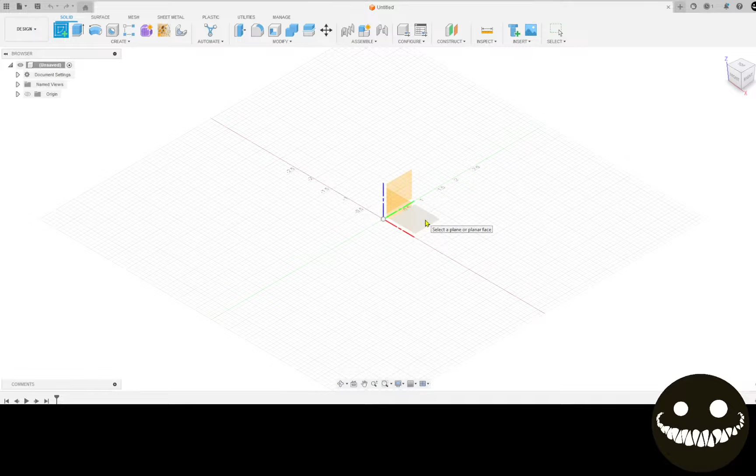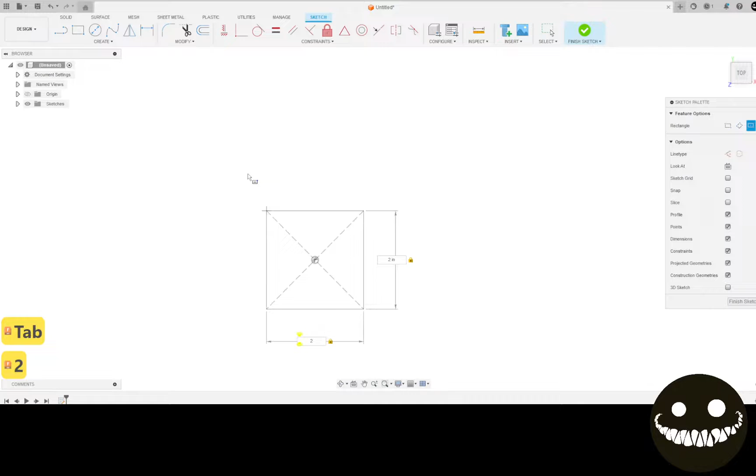I'm going to pick a rectangle, selecting a center point rectangle. I'm going to create a 2 and use tab to move to the other dimension, making a 2-inch square. Now I'm going to hit C to bring up the circle tool, or I could also access it here. Start at the center, pull it out 1 inch.

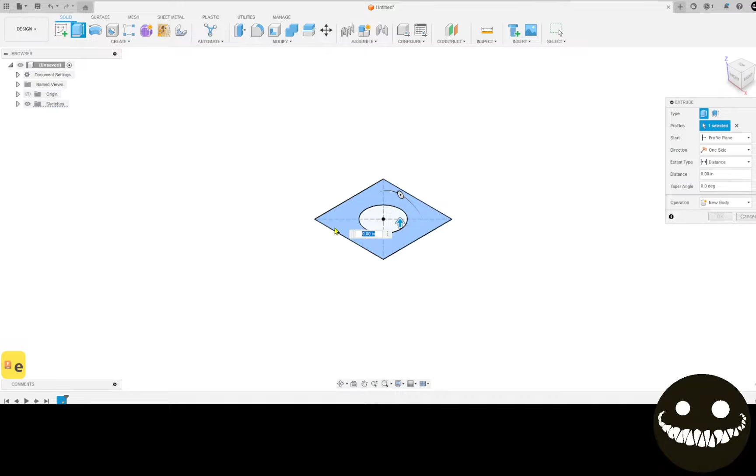Now from here I'm going to hit E for extrude, turning this two-dimensional sketch by adding a thickness of the material I plan on cutting, in this case 14 gauge, into a 3-dimensional body. You can see here it's saying it's making a new body. Now this sketch has become a body.

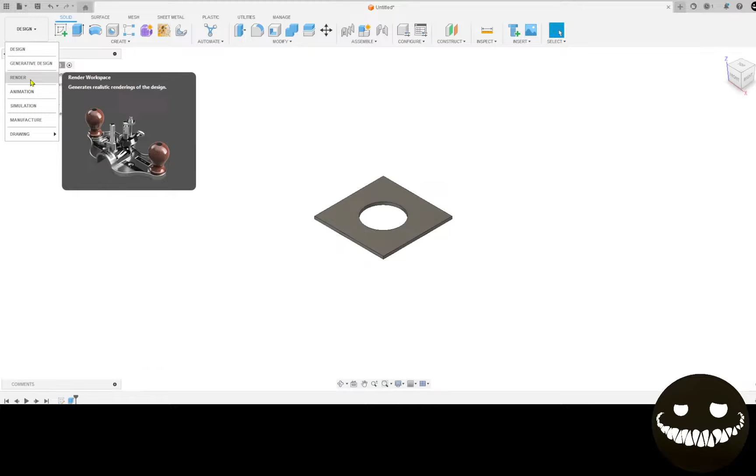From here, we'll move from the design workspace to the manufacturing workspace. And now in the manufacturing workspace, we'll make sure we're in the fabrication tab. We're going to go over to setup. Clicking setup will bring up the setup menu.

A few things to note here: we have the body that we created, and we have this golden shadow around the body, which is a representation of the material space we plan on using. And then the X, Y, Z, which is our origin on the work - where 0 is on the workpiece, the starting point.

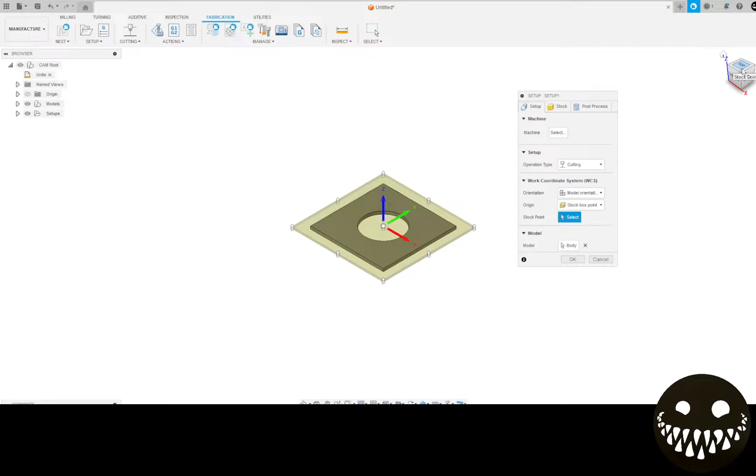So the first thing we want to do is move that stock point, or this 0 point, to the bottom left corner. I'm going to move the navigation so we're looking at the top, and this is how it would look sitting in front of the Pro. We always go to the bottom left-hand corner.

You can see we have a little bit of extra material on the edge, and that's because in mine I happen to put a default of adding an extra 1/4 inch around. In actuality, you'll end up with a bigger piece of material. This is just going to be your reference 0.

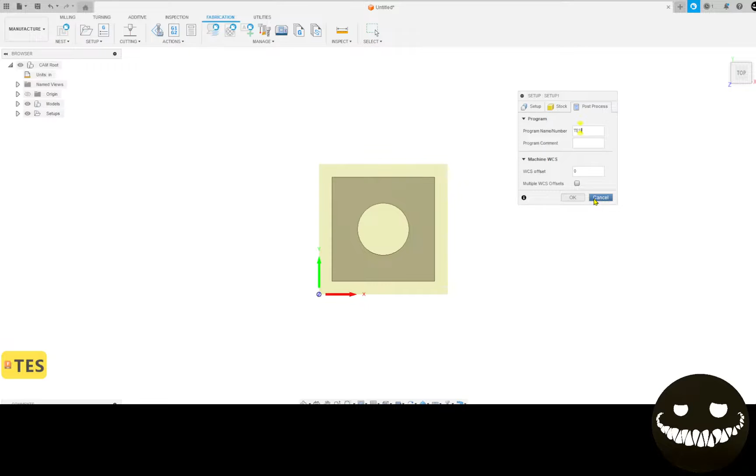In the post-processing tab, I like to add in a name, so we can do test square. And right below here, if there's any particular comment that you want in the G-code that you can watch later on or look at later on the machine, this is where you would put it. I'm going to hit OK.

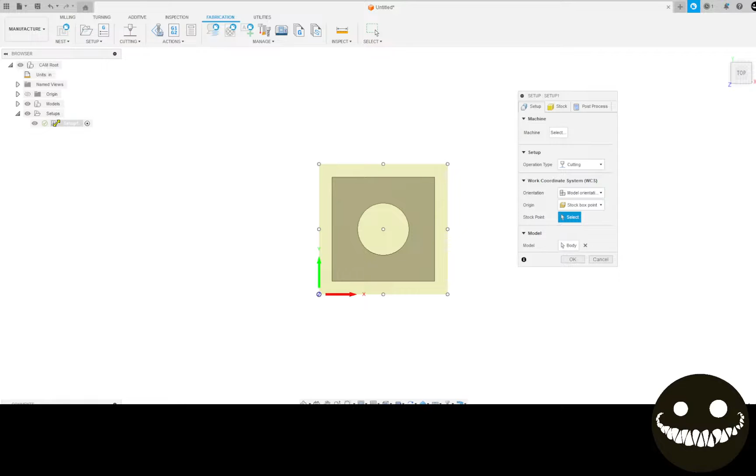Actually, I can edit this just by double-clicking this folder. And then I'm going to go back here and I will add a comment, just so you'll see that in the G-code at the end when we go look at that.

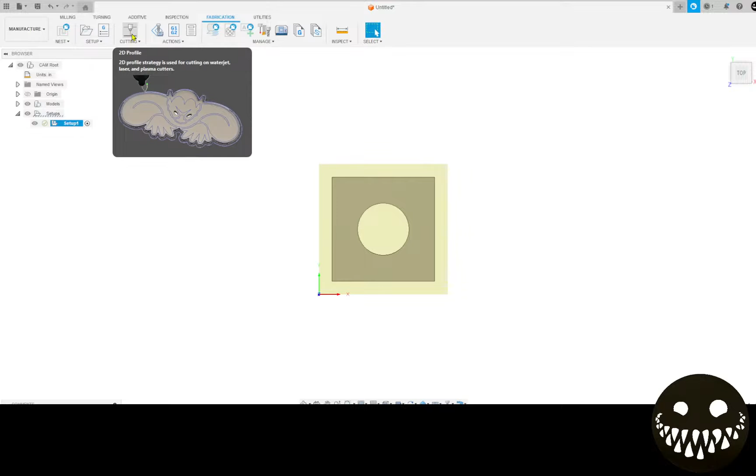Now we have that set up. You can see it's been created over here. And from here we're going to move into the 2D profile. This is where all of our tool and cutting paths will be located. We're going to click that. It'll bring up the 2D profile menu.

First thing in the 2D profile menu is the tool tab. We'll start by selecting a tool. I always grab one from my local library - this is where you'll want to create and save new tools. So I have an example tool in here I'm going to use, the example 45 amp tool. Select. I'm assuming you already know how to go through the process of developing a tool.

It shows the cutting speeds of that tool down here. Next we'll move into the geometry tab, and we'll simply pick this face and it'll select this entire contour automatically. Face contours, it says here.

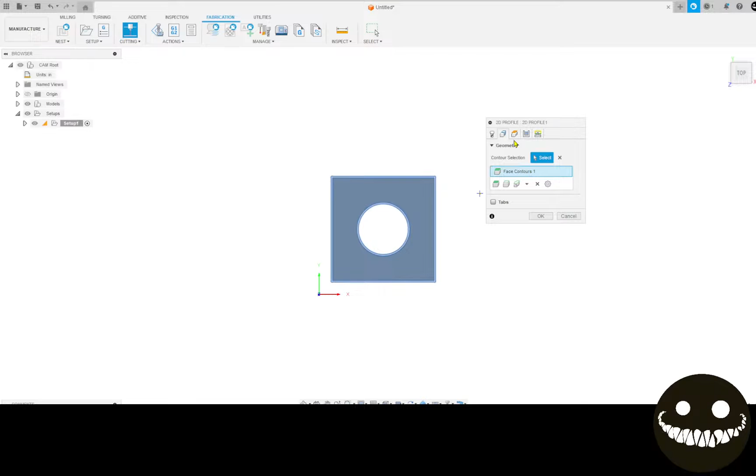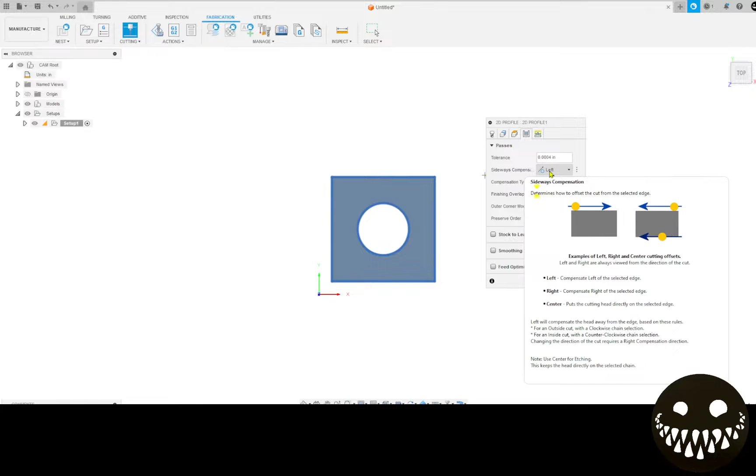Sideways compensation is always left, except for when I usually do a test square, I like center in that case. Finishing overlap cuts past the end of your cut slightly, just to smooth out any irregularities.

We are going to go to the next tab, which is linking. So this is paths, essentially. So the lead in entry is how that's going to lead in, and the lead into the piece. So it'll pierce off the material somewhere and then come on into it and then work its way around.

We're not going to use any of the lead in, lead outs, or the pierce clearance, because we're going to be doing a kerf width test with this piece.

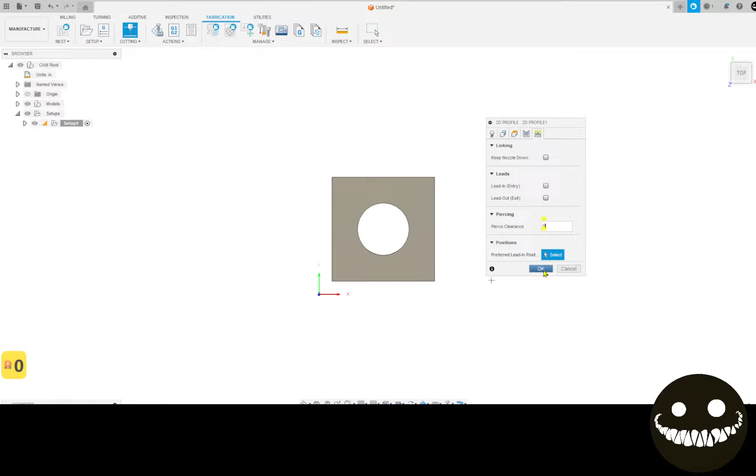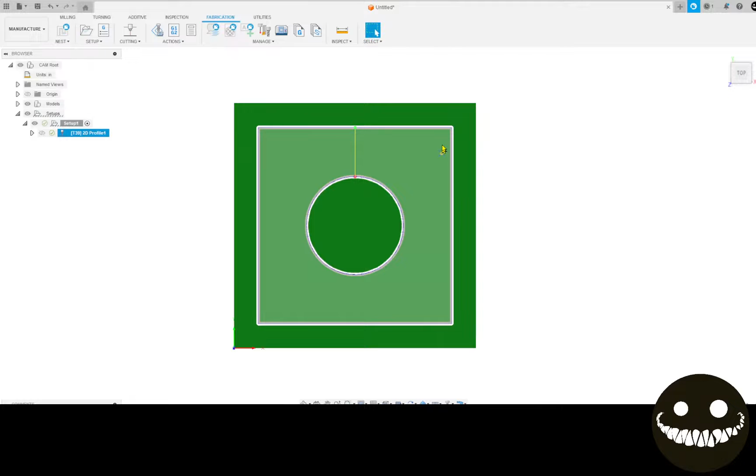Okay, now let's develop this tool path, which the head comes straight down, pierces right directly on the center of the line, cuts all around the piece on the center of that line, moves up, goes down, cuts the outside piece right on the center of the line. Let's just take a look at that in the simulation.

Turn down the music a little bit. Not inspection, simulation please. So in the simulation, it cuts that really fast. So it's cutting it right on the line.

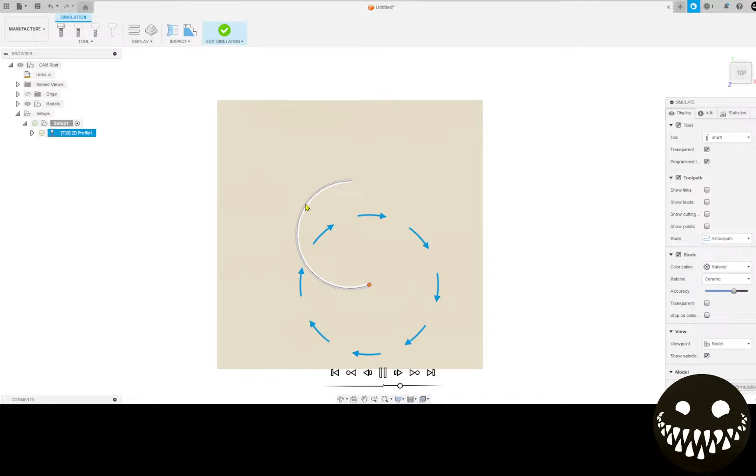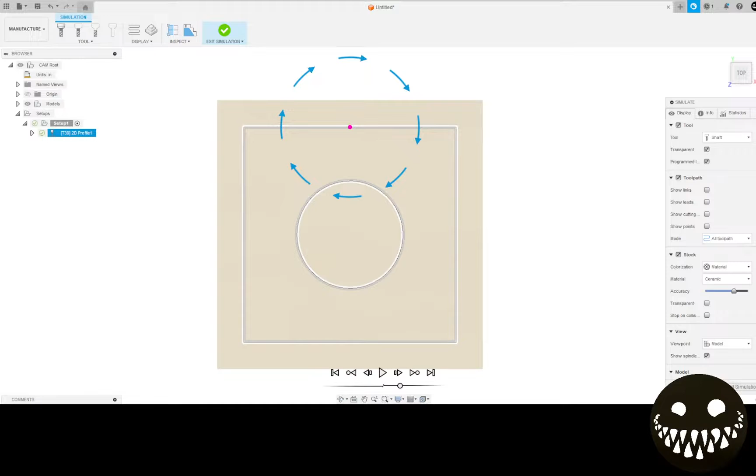So the idea behind doing that on a kerf width test is because now if you measured the outside of that hole, the amount that piece is small compared to 2 inches is going to be your kerf width. And if you measure the inside hole, the amount bigger that hole is than 1 inch is going to be your kerf width. So you could check it in a few different ways and average it, and then input that into your tool library if you wanted really accurate kerf widths.

Okay, let's exit the simulation. Now from here I have a pathway underneath the setup. So I originally created the setup, and now I created these paths.

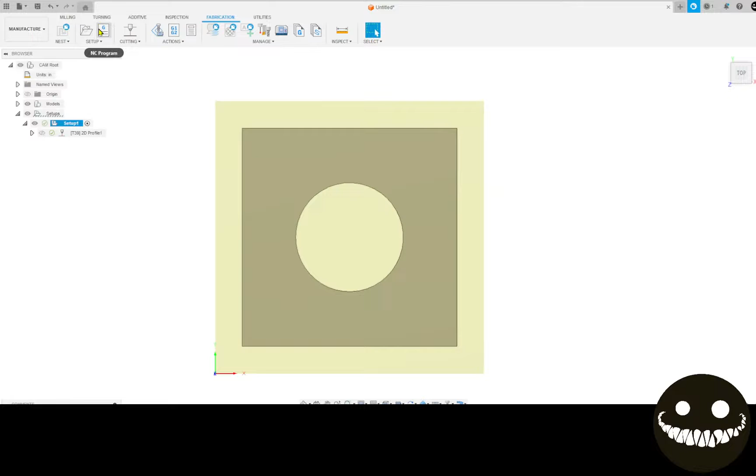So from here I'm going to make sure that I have that setup selected in blue, and then I'm going to go up to the NC program, this little rectangle with the G on it, select it here. I'm going to make sure my post processor's in place.

I have my test square. Let's see that it automatically pulled that comment forward. I could modify it here if I'd like.

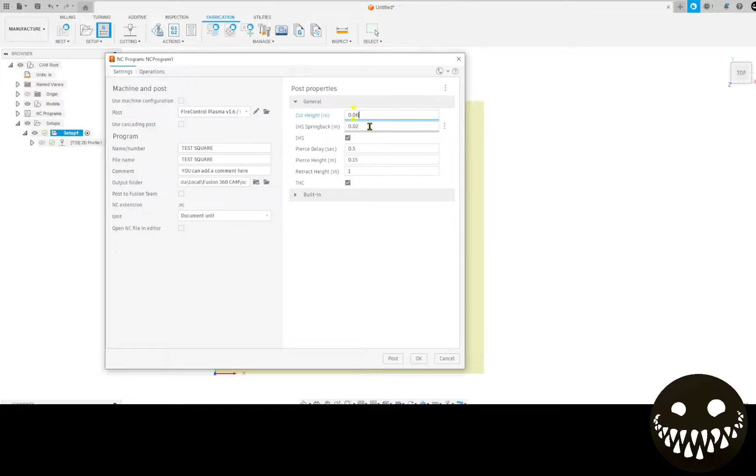I'm just going to go with the general cut height, spring back, pierce delay, and pierce height. I have a THC and/or IHS and THC, so they're both selected. 1 inch retract height, how much it moves up in between cut areas.

So I'm going to post this. Sure, yes.

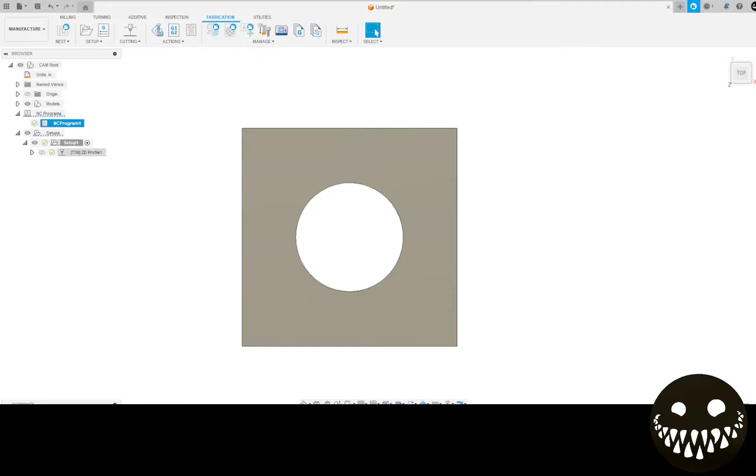And now I'm going to view the G code down here at the bottom. And it's probably brought it up on some other my monitor. Yep, there we go. So here's the G code. Oh, and I can't zoom in on this one. That's too bad. Here, let's see.

And you can see it shows what post-processor version it is, which is 1.6 for Autodesk Fusion. Here's that comment it added. You can add a comment here. This is relating to the origin 0.

And then it just goes through all those test cuts. It's about 50 lines of code. Oh, it's exactly 50 lines of code. And that's it.

All right, that was pretty basic walkover, but walkthrough. So we glossed over a few items there, but I think that's the gist of how the process goes. Thanks for watching.